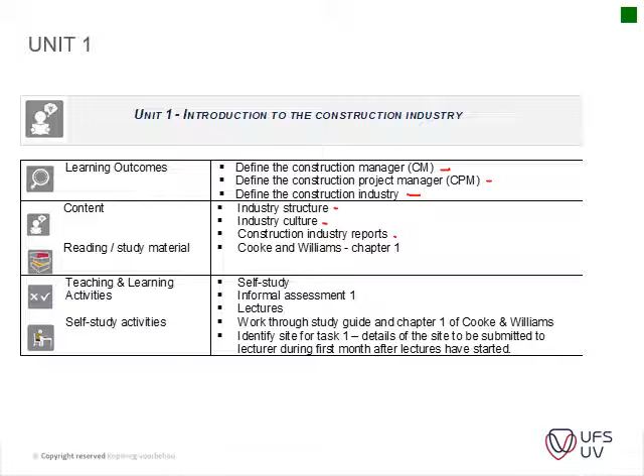Looking at the definitions of the construction manager, firstly the SACPCMP defines a construction manager as the physical construction process within the built environment, and includes the coordination, administration, management of resources. So you can see it's a bit more the actual construction side, and then the construction manager is the one point of responsibility.

He's the person that manages that process of the actual construction, whereas the construction project manager is the management of projects within the built environment from conception to completion, including management of related professional services. The construction project manager is the one point responsible in this regard.

Another definition to differentiate between the two: the construction manager is usually involved from stage 4 to 6, whereas the construction project manager is involved from stage 1 to 6, and fulfills a consultant type of obligation.

And then the definition from the Construction Regulations 2014: the construction manager means the competent person responsible for the management of physical construction processes and the coordination, administration, management of resources on a construction site. So you can see it's very similar to the SACPCMP's definition.

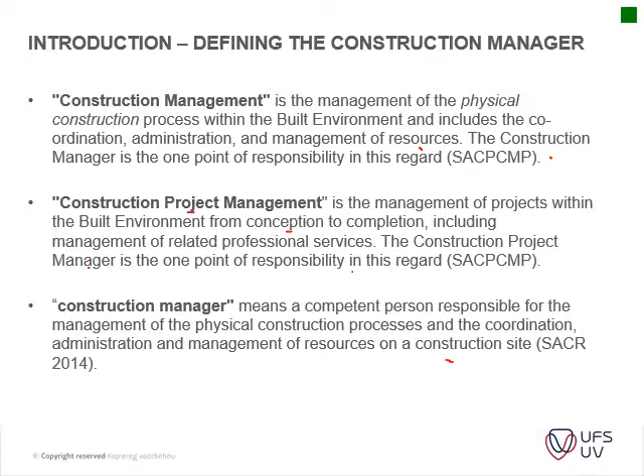I also included Wikipedia's definition, which will give you a bit of insight: construction industry site managers are often referred to as construction managers. Site agents or building managers are responsible for the day-to-day on-site running of construction projects. Site managers are required to keep within the timescale and budget of a project and manage any delays or problems encountered on site during the construction project.

They're also involved in the role of managing quality control, health and safety checks, and the inspection of work carried out. Many site managers will be involved before site activity takes place and are responsible for managing communication between all parties within or involved in the on-site development of the project. Site managers are often required to deal with inquiries and communication with the public as well.

Typically, a site manager is employed by a construction company, contractors or civil engineering firms, but is often employed by local authorities to oversee refurbishment of council-owned properties. So this is just a very broad take, and it also incorporates other areas in the world.

So you can see a construction manager usually starts out as a site manager, and then progresses to where he has more than one site and a portfolio of sites that he's managing. So it's not that you're only becoming a site manager as such, but you're going to manage a whole lot of sites in the end. Usually you start on a site, depending on the size of the project. You can have anything from one site manager to a couple of site managers.

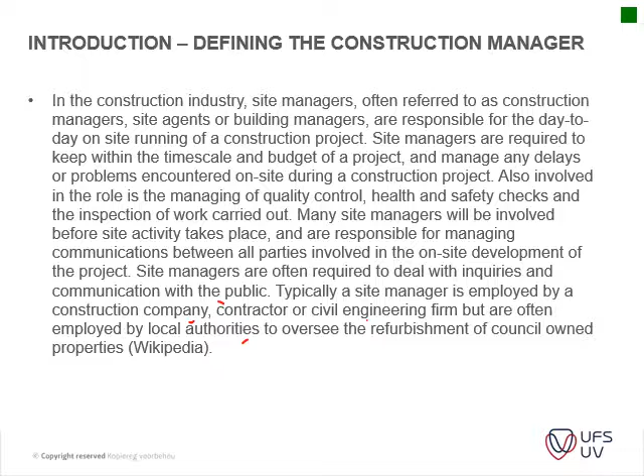The seriousness of the construction regulations. I just wanted to highlight this to you. A principal contractor must in writing appoint one full-time competent person as a construction manager with the duty of managing all construction work on a single site, including ensuring occupational health and safety compliance, and in the absence of the construction manager, an alternative must be appointed by the principal contractor. So the basic thing is you need a professional appointed to take responsibility for the project. Many contractors appoint external professionals to act as the construction manager, and they might have multiple projects underneath their wing.

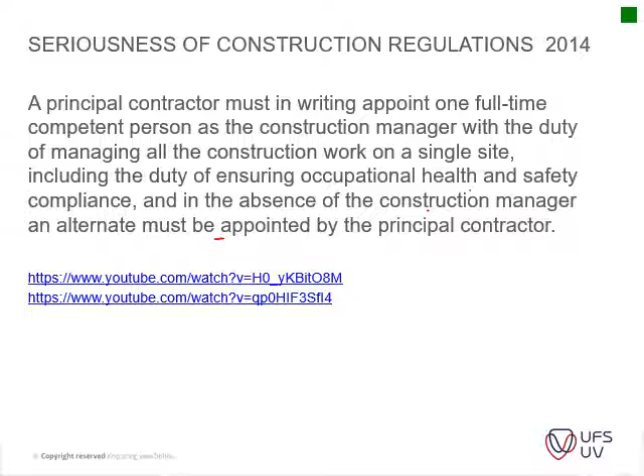Okay, the construction project management. So yes, I've shown this in our first lecture as well. I've just highlighted how a typical project, doesn't matter whether you're doing design of a new airplane or software development or whatever, more or less looks like this, where you have your concept initiation, design and development, implementation or construction, and commission or handover.

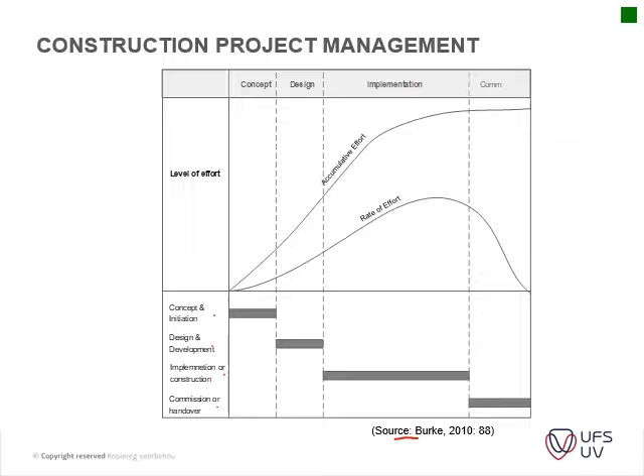Whereas the construction industry has stages 1 to 2, which is your inception and concept feasibility. We have stages 3 and 4, which is our design and procurement stages. Then we've got our construction or implementation phase, and then we've got our closeout phase, which just feeds into phase 1 and 2, or into one again. So whenever you're doing tenders again, you would pull out a previous project and you will start there looking at possible rates. If you don't have any rates, you will source new rates, do your rate build-ups, etc. So this is more or less how it works, and this is universal for whether you're a professional engineer, whether you're architect, QS, construction manager.

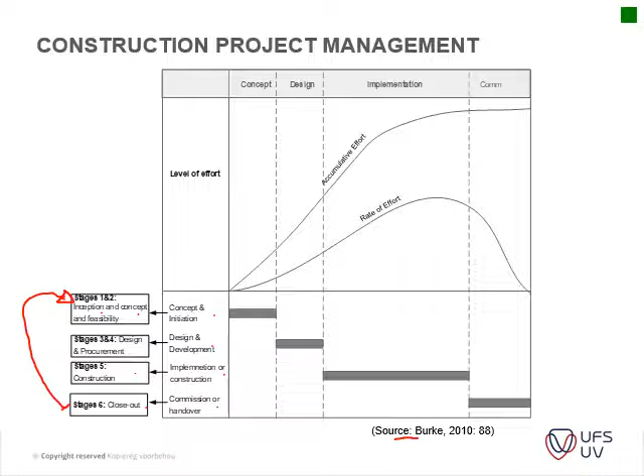Everyone within the South African construction industry uses these 6 stages to actually go and do their work. Okay, so we're going to look at these items. I'm not going to go in too much depth, but basically I'm going to look at the outcomes of each one and give you some examples.

So agreeing with the client and preferences, assessing user needs and options, appointment of the necessary consultants in establishing project brief, objectives, priorities, constraints, assumptions, and strategies in consulting with the client. So the basic thing is to get a scope, and that is very difficult sometimes with your client, because much of the time they don't really know themselves what they're looking for.

So standard services that a professional provides to the client, the construction project manager, you can go through these, but the outcomes from these sessions is basically you need a project brief, project procurement policy, signed consultant client agreements. Who are you going to appoint? Are you going to need an engineer, mechanical, health and safety consultants? Do you need an architect? Do you need an IT specialist, etc. Project initiation of program.

So you get a master program that you start compiling. We'll still get to the master program. And then record all your meetings, very important. Approval by the client. This might seem as a given, but many times you don't have signed documents that you can proceed that they have accepted the documentation that was provided to them, and suddenly they make changes, but this is not what we wanted, we wanted a smaller building, for instance, and so on. Okay, so it's good to have a document that's signed off to proceed to stage 2.

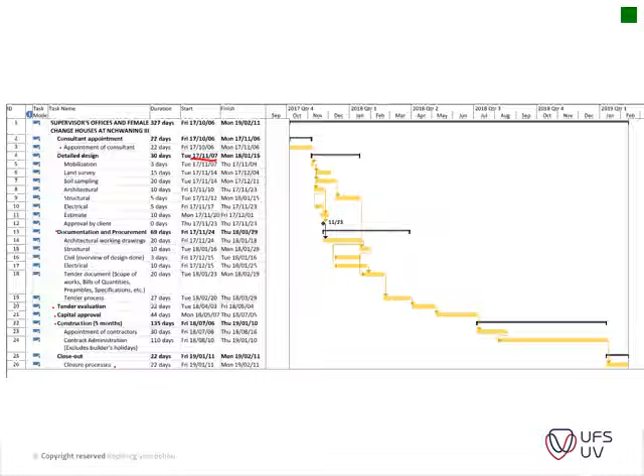So many times in this early stage, the client would say, I want to occupy this building by next year February, or next year July, whatever. And then usually you work backwards from that date and compile your master program that you present to your client.

And then we get to stage 2, our concept and viability. So now you basically go through the documentation again. You make sure what the design is and the information is expanded, etc. So this is basically what is done in the concept and viability.

You facilitate the approval. The main thing now is putting meat to the bones and seeing whether the project is actually feasible. Will it fit within the budget? Does the size of the building actually fit within the budget of the client? Is there enough space? Will it fit? All of those items are clarified. So it's very important to read through all of this.

And then in particular, you have new signed consultant client agreements. This is usually people that come on board at later stages. Now you've established we're going to have a big solar installation on this building, so you might have to appoint a solar specialist to assist at this early stage, just giving advice, speaking to the electrical engineers, and so on.

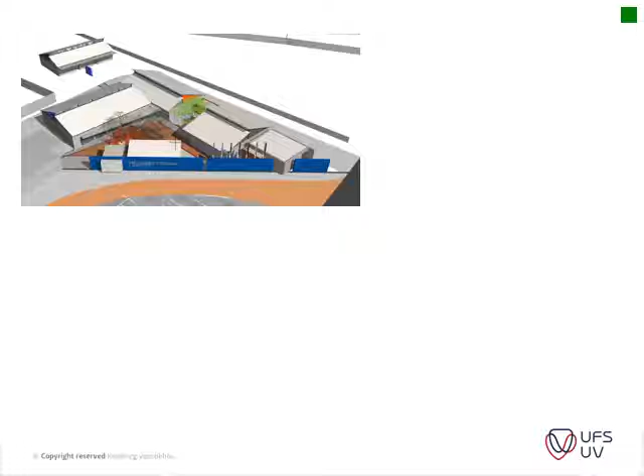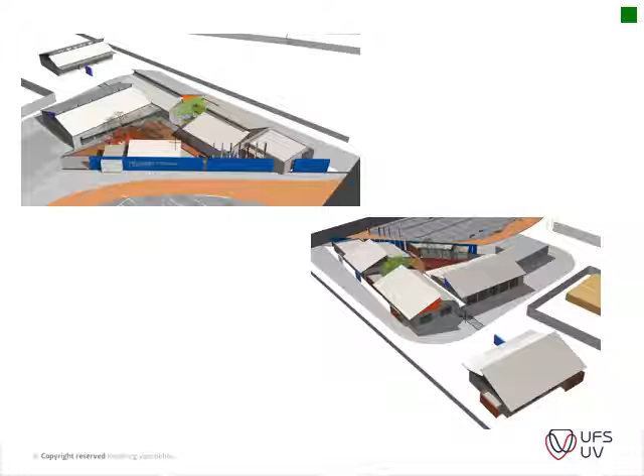And then what I've included is just typical drawings or items that you will get to. This is a project that we did in Blackrock, and this was just concept. I think this project has continued, I'm not too involved in it anymore, and this is basically what the architect produced. It's just a concept of what this project would entail. This was a small service center of office spaces that was provided - there was space for like a tire dealer, a little radio station, health and safety, a clothing store, etc.

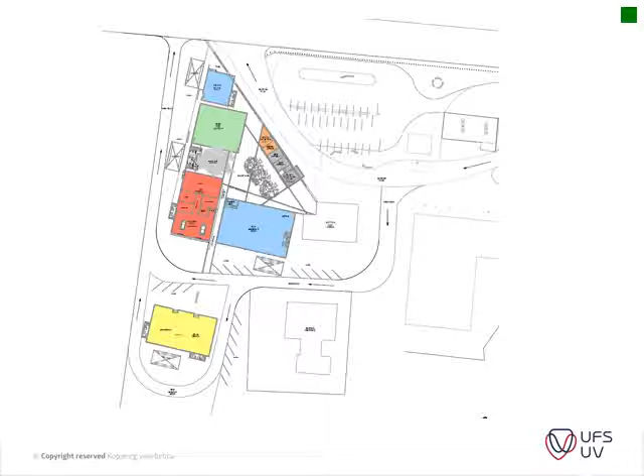So this was just a small concept that was done. And then the architect provided us with the following details. You can see it's just a footprint of the drawings, the layout of the site, and on the site we could establish what the square meter areas were for everything, and from this we could develop a basic estimate.

And just a bit of background on how this process actually works - the client could say, okay, I have enough money to continue with the project, please proceed to stage 3.

And this is just the measurement work. This was from Dimex that I did it, and you can see it's basically just the square meter areas that we got, and obviously connecting the right grades is also very, very important. I think I didn't include - not all of the items are shown here, so like the road, etc., but some sections were kept in and others were left out.

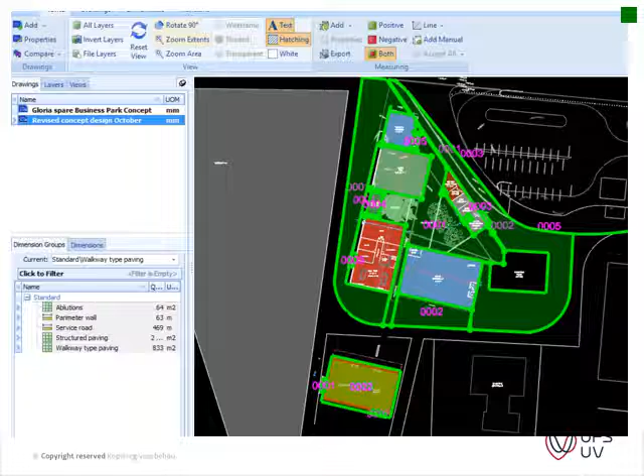And then we get to stage 3, design development. Managing and coordination of the integrated design development.

So usually in design development, what happens is the footprint has been established. Now we start looking at what type of finishes are we going to use. Are we going to use brick and mortar? Is it going to be lightweight steel? Even though you've discussed it in stage 2, maybe it now becomes a reality.

Now you start sourcing more info so that you can produce an elemental estimate for your client to get a more accurate design. So again, read through all of this. This is very important, not only for this module, but also for working in the construction industry, so that you know what the outcomes are.

Okay, so again, we've got signed consultancy agreements. Anyone that comes on board again, or if anything has to change, if the scope changed maybe, or something like that. Detailed design, documentation, and program.

So you update your program to incorporate all of this new information. Maybe you've learned that the procurement process from the client has a certain amount of stages, like stage 1 is maybe the budget approval, then it has to go to someone else for approval. Then you can actually increase the accuracy of that.

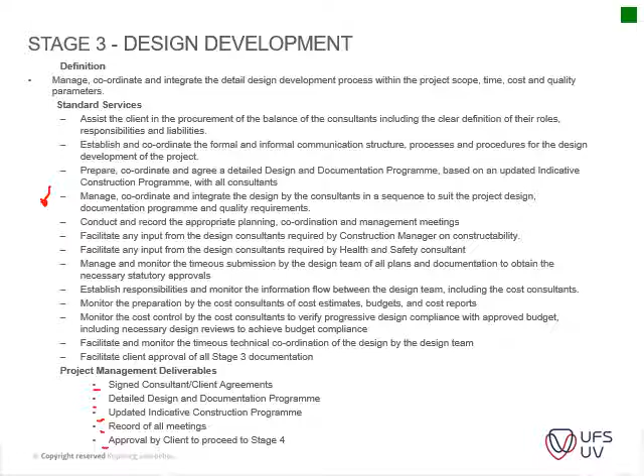Okay, and this is some typical drawings. You can see now this is an evolution that we did also there in the BlackRock area, and you can see how much detail is added.

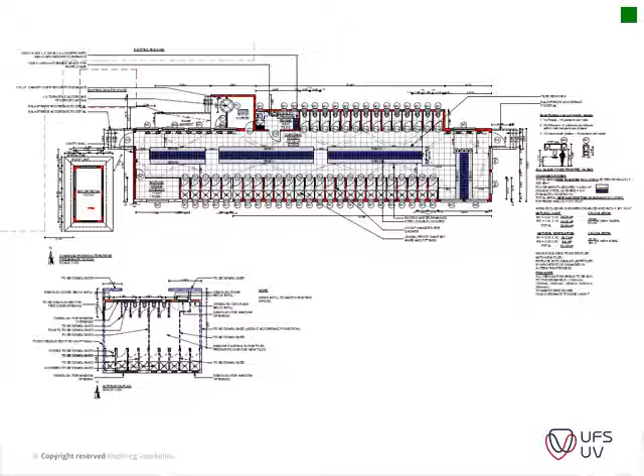So now you start getting a bit more information on the amount of toilets that's going to be installed, just the basic layout and items, the accommodation of showers, toilets, female, non-female. You're going to have a boiler room to service this entire structure, building. Okay, so you get more information like that.

Okay, and then in this instance now you can start playing around with existing mobile. On this project we had a mobile change house that was there, whether we're going to use the mobile as an additional ablution or existing and sectional completion. Are we going to use a certain section of the one, do it in phases, or are we going to demolish the existing mobile and change houses and then just start from scratch, or new next to existing and demolition of existing?

So the client can now have a look at the different options and make a decision based on the different costs involved.

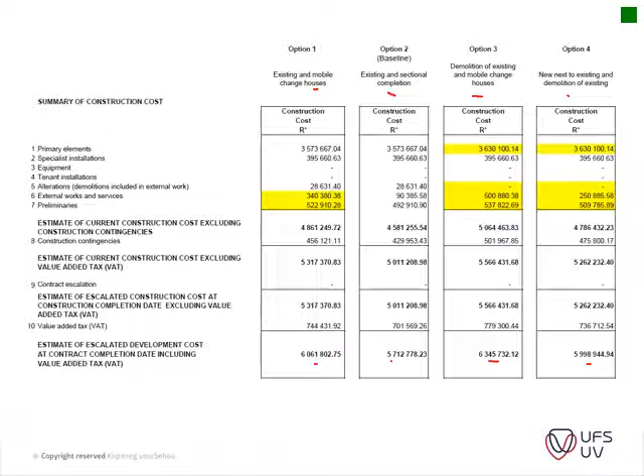Okay, then we get to documentation and procurement, and I think most of you will be proficient with this because this is what we've done throughout your undergrad degree up to thus far. Looking at the procurement process, this is where all the detail and most of the work is done, so that you have a contractual document and all the information available that can go out on tender.

Okay, and then again it's the process of establishing and implementing procurement strategies and procedures, including the preparation of necessary documentation for effective timeous execution of the project. So okay, if this is done right, your project will run smoothly, barring the natural hiccups that you will encounter or challenges that you will encounter.

So the contractors, subcontractors and suppliers procurement strategy, how are we going to do it?

What type of contract is it going to be? JBCC, GCC, FIDIC, or whatever contract it might be.

Okay, and then the project procurement program is developed. So now you've got a bit more detail, and now you start focusing on going forward from the tender process up to the completion stage.

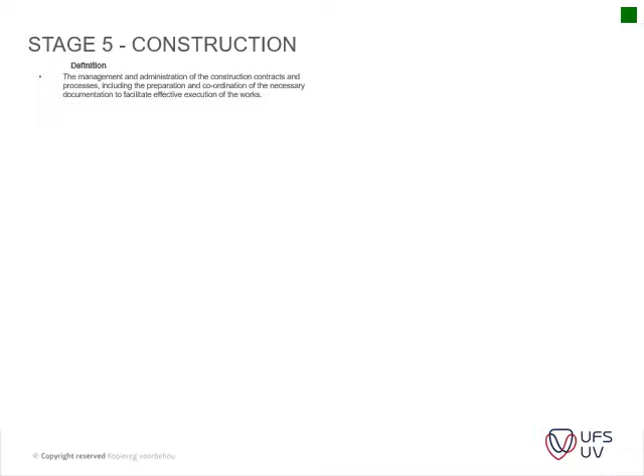And then we get to our actual implementation, and this is where the construction project manager is very important. You've done all the planning and the procurement, you've gone through all the processes, and now you need to control it. So again, go through all of these items.

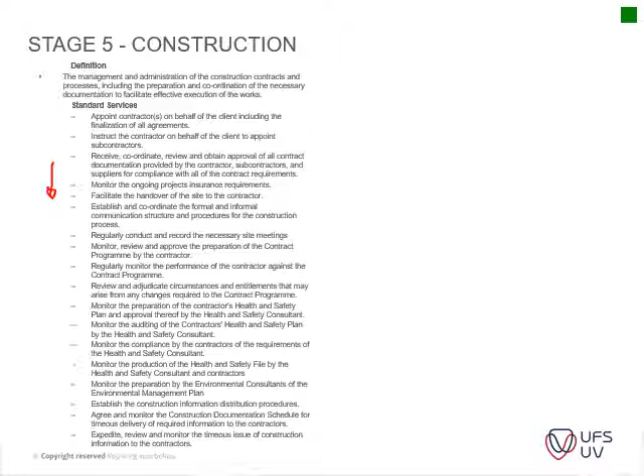You will see there's quite a lot of these items. I will also post the Gazette on Blackboard so that you will have access to that.

So please make sure that you've got that. And then the outcome at the end is a signed contractor's agreement at the start of the project, agreed contract program. Is it resource based? Is it not resource based, etc. Adjudication and award of contractual claims, construction documentation schedule.

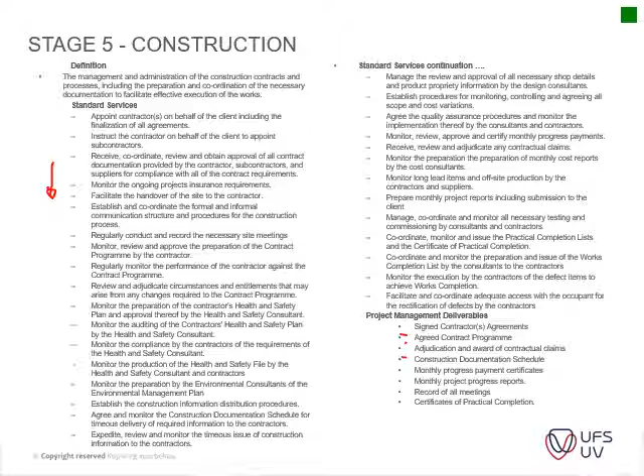You've got your monthly progress payment certificates, monthly project progress reports. Again, you need to record all your meetings and certificates of practical completion. So very important, your administration is key to all of these items.

Simple things like the dates on when drawings are issued. For if the contractor makes a mistake, perhaps on levels, you can see, okay, did he do it according to the drawing? Did he work on the latest drawing or not? Small items like that are very important.

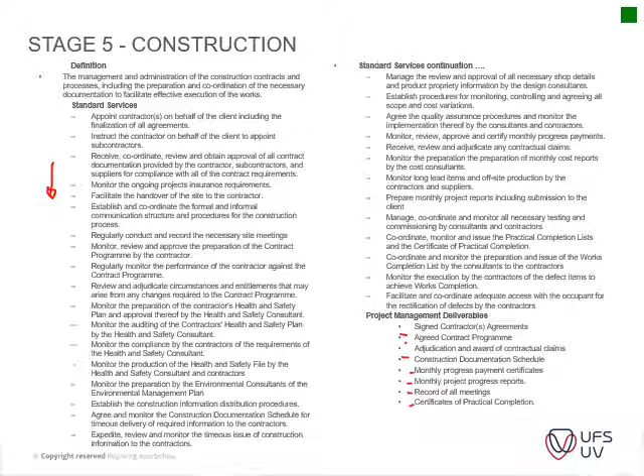So bookkeeping, administration is extremely important on any project.

Okay, and then I just added what everyone thinks we do on a project and what we basically do on a project. We discuss items a lot of the times in site meetings, and you solve a lot of problems.

It's actually quite nice to work on these projects because of the challenges that you have to face and address, and I think that's why most of us got into the construction industry.

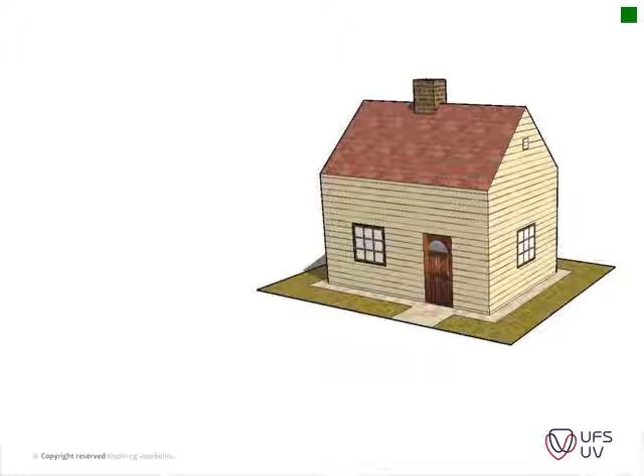Okay, then closeout. Don't forget about the closeout, extremely important, because this is where everything is signed off and you have made sure that everything is correct, and where you get your lessons learned that you're going to implement in your next project.

So you have your works completion certificate, certificate of final completion, record of all the meetings, project closeout report. Very important, this project closeout report. It just covers yourself, whether the client was actually happy with everything that happened, and that there won't be any comebacks later on.

Try and look for solutions rather than pointing out mistakes on your project, and remember that your team and the contractor will probably know the most practical, or have a lot of practical experience that you can tap into if you're the consultant. If you're a contractor, please also note that the consultant will give you very valuable information on exactly what the client wants.